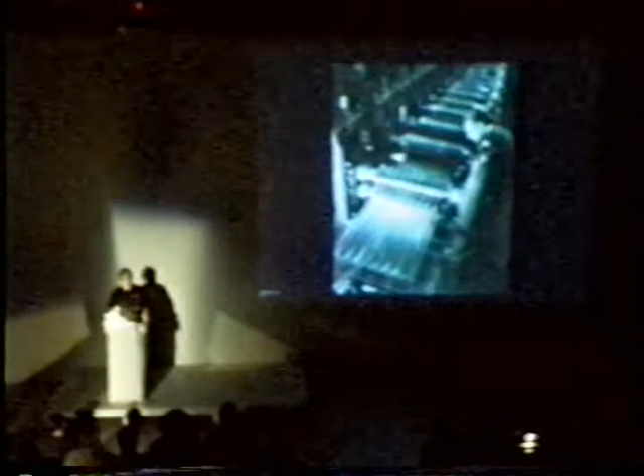You'll see towards the end of this—I also decided that this would be the longest lecture that I ever gave, because I've got a lot of stuff. So I think it's probably not the right night to do that. So what I'll do is go through things very, very rapidly.

But I will, towards the end, pause at just some images of some steel work that we've done as a way of discussing the importation, or basically the importing of the tool into panelization—something I'm more obsessed with at a kind of smaller scale than concrete at the moment.

But the idea—I've shown this slide many times before, and I can't kind of get over it. It's mostly because I like this guy's hair. In 19th century technology, it was just a kind of dumb but brilliant idea that if you look at the back of this image, one roller would produce one crimp, and then ultimately you'd have 12 rollers, 12 segments to 12 crimps to develop a kind of corrugated material.

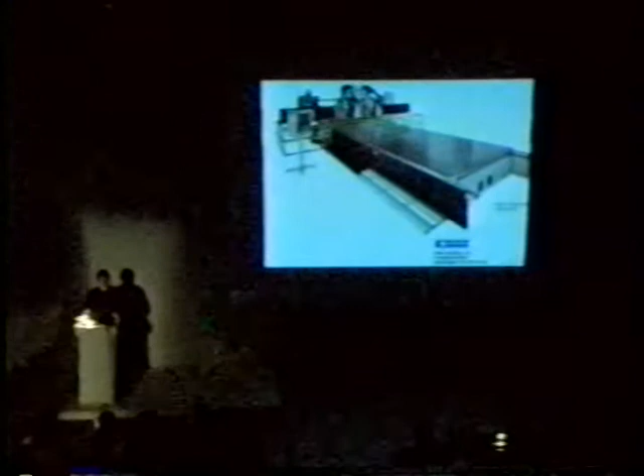I don't have a machine like this—this is just a really pretty one. It's very, very expensive, that's why I don't have one of these. But it's a computer numerically controlled milling machine.

I am going to kind of skip through some things, otherwise we will be here quite some time. This was just really to introduce an idea of this kind of subject-object relationship.

It was a competition in which—I can't resist, I have to go back real quick—it was a competition that I didn't win, or I was actually disqualified, which is better than losing.

I was disqualified because I interpreted the rules of the Battle of Little Bighorn competition as thickness versus actual drawing. It said no models, but I thought I could just machine a bas relief of the boards for the actual presentation. They disqualified me based on that idea, but that was the idea of the memorial I was designing.

There was also this idea of imprint and Native American women's beadwork, which I won't go into right now. But on the back of the board there was a disc taped in an envelope, and it said if you choose this project, all you have to do is take this disc and insert it using a Komo CNC machine and 2-pound rigid foam, and then you can make the memorial.

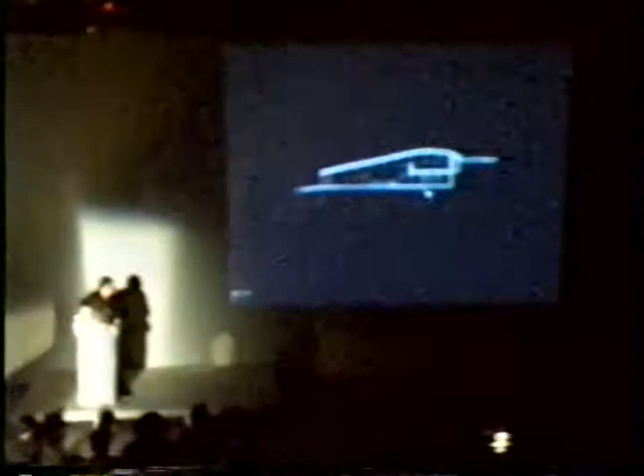The program is the only program that I've done entirely under my own kind of authorship, except for the stuff that you won't see, which is to make money. There's some contract interiors deep in my past, like, I don't know.

The building kind of hugs the landscape, and the foreground and background topographies were in fact the main and primary geometry that I started to use to make kind of enclosure. They were obviously negotiated with structure and structural condition, which I'll talk about in a few minutes.

The idea for the building was a notion of visual rhyming. I don't really know how to define that specifically, except if one says - and being in Los Angeles with the new movie coming out, Cat in the Hat - if you say cat and hat, just by the juxtaposition of those two words, the fact that they audibly rhyme develops a relationship which is a little bit more developed than two words that don't rhyme.

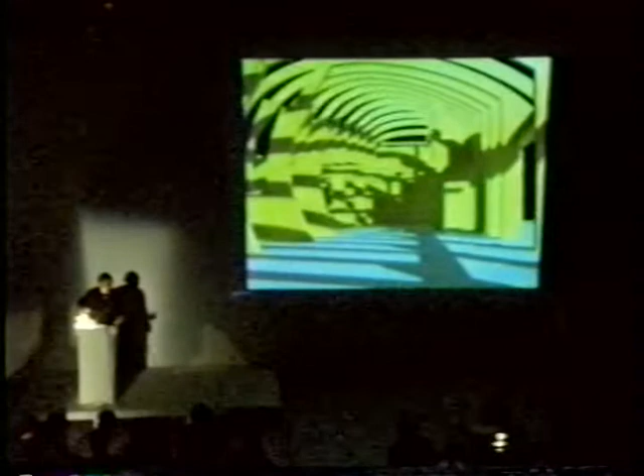I got a Mini, and I hate the large speedometer in the Mini, so I was going to spend the other $1,500 to get GPS, but I couldn't afford it. Effectively, the idea that one can drive anywhere in North America and information as to where you are becomes completely available all the time - the idea of planning and the idea of improvisation becomes very much a criticism of the idea of mapping, to my mind.

The Big Belt house, the house that I'm talking about, was developed in whatever way we could.

We cast models to actually test the structure. I couldn't get anybody to run the numbers effectively - I didn't have any money, that was one thing, and number two, no one was really capable. I just didn't know the right people, quite frankly. I know there are many people who are very capable of doing that.

But what we did in lieu of knowing those people was cast lead buckshot into silicone rubber - any excuse to do something like that is worthwhile - to simulate snow load. So we built physical models in buckshot and rubber, put them on air-impregnated PVC models, big models, and looked at the deformation. You'll see the building is made of these portal frames of concrete.

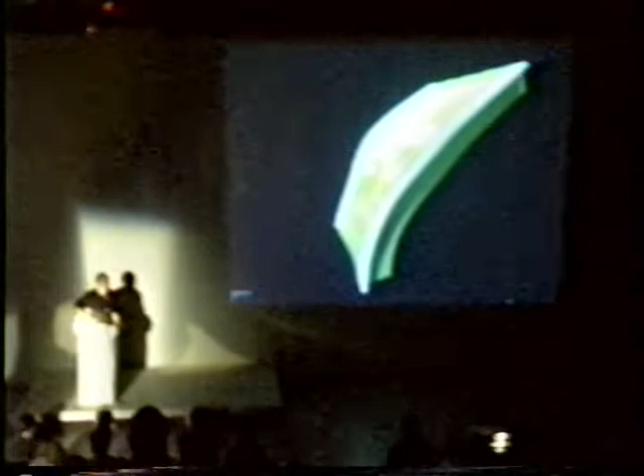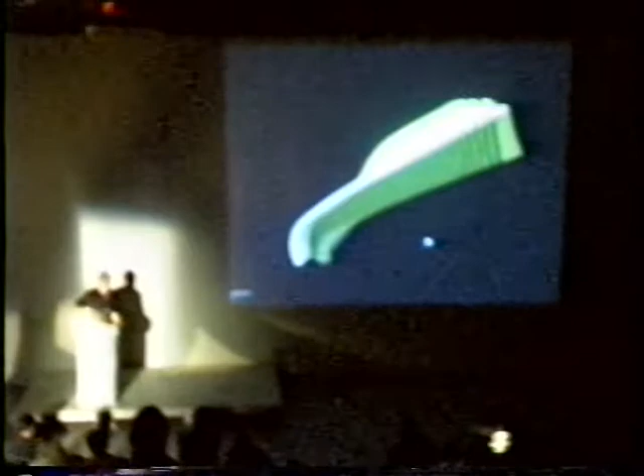Once that was actually happening, somebody came out to the job site and thought it was a really terrific idea—I was trying to quickly shotcrete it with concrete so nobody knew how crazy this was. But somebody thought it was actually a good idea and hired me to do a building in which we studied that relationship. Instead of it being a retrofit condition, we looked at two-directional curvature being a byproduct of tube structure, and this is kind of ongoing research as well.

The way we held the surfaces together in this project was through laser cut steel—actually this is plasma cut steel. This is kind of a little commercial; this is not the Big Belt House, this is the next project I was talking about. I'm not going to really talk about this building at all, except for one thing.

Through the making of these puzzle pieces, through our office being responsible for every piece of material that gets made, more and more we're not really making parts, but we're choreographing work. We now understand that that's really what we're doing. We're actually modeling the conduit of all the electrical and all the plumbing returns on our projects, as a way of producing jigs and fixtures which locate all of those things in space.

So we are not actually producing drawings that have numbers—we're producing drawings that have sequences. What we're doing is thinking about construction and construction documentation being based on choreography versus legal documents. For instance, this whole building.

There's a steel jig that we laid down on the ground. This is an Alaskan reinforced concrete slab, thickened to 20 inches at the edge and about 5 inches thick in the center—it's all radiant floor slab. What we did is we made a steel jig that located every bolt, every plumbing riser, all of the location of the radiant tubing, and also this thing we affectionately called the caterpillar that actually located the edge.

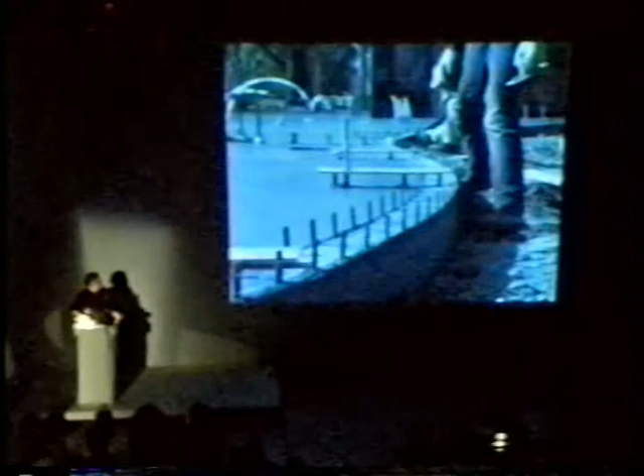Obviously, if that were a straight cut too, the relationship of this curvature would all be off if one positioned it wrong. So what we're trying to do, instead of expending the energy it takes for an architect to communicate something to someone else legally, philosophically, and scientifically, is to take that energy and place it into the notion of choreographing a building.

The ideas of prefabrication and prefab, I really don't think about them the same way other people do. I think about digital space as being the place of prefabrication. But of course, that's what documentation in terms of architecture has always been. It's just a kind of compression of that.

If we go back, you can see that everything is on the slab, there's just nothing else in this building except for the slab in a way. All of the electrical, all the plumbing, it's all in the slab.

No building codes in Montana. That's why I moved there.

And then there's the kind of commodification of that idea by literally producing plasma-cut jigs that just hold and script the PVC pipe in one position, and that one position is easy. In fact, the more conventional components of the building took much longer than the unconventional ones.

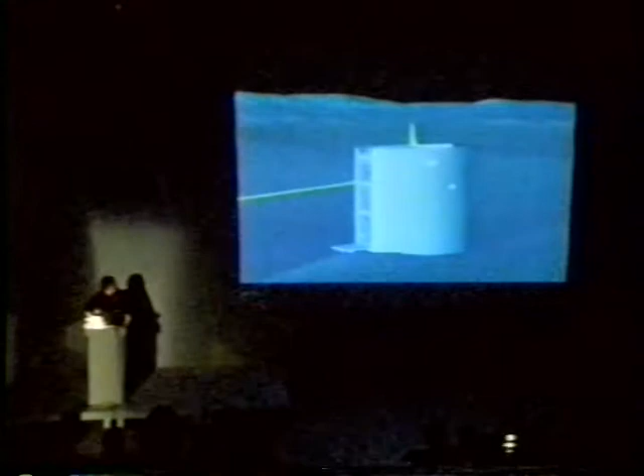I'll move much faster now. This is a view looking the opposite way, where the building sits and negotiates the view off to Mount Edith and this single double tree. You can see this 6 miles of highway turn and get eclipsed right at this joint, and then this is the driveway that comes up.

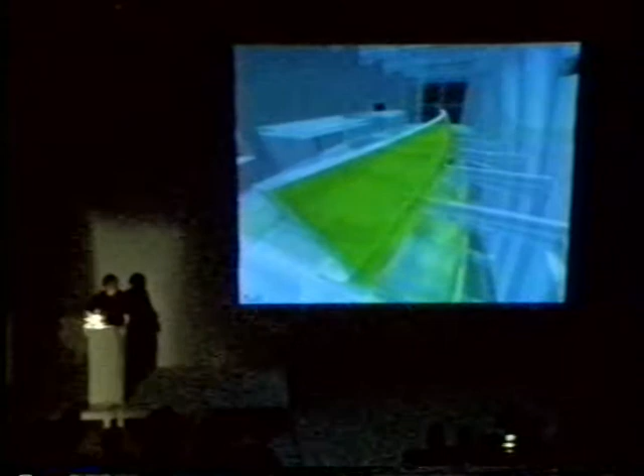The idea was to cast the interior wall and ceiling surfaces out of translucent rubber, but that would have changed the budget from about $160,000 for the whole building, which is what it cost, to like $14 million. So we didn't do that.

Hopefully this image brings us to the next project, which is a house for a photographer, a wonderful photographer in New York. She's shown here, and she photographs kind of mobile architecture, box cars, containers, these kinds of things. But the notion of the building was to remove itself from the landscape, like the hunter's hat, to identify it as something alien or not of the landscape, developing this third relationship to the landscape - first merging, then marking, then ignoring the landscape. I don't have a fourth one, those are the only three I could think of.

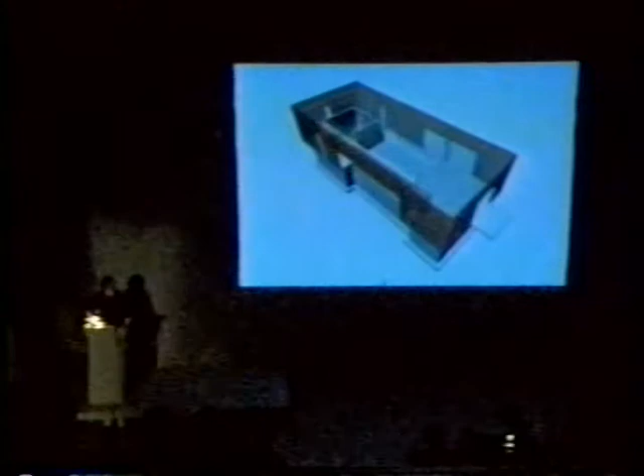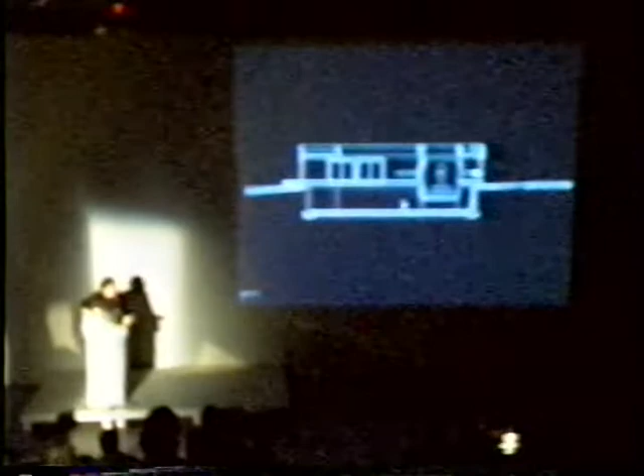This house was fairly small. The photographer is a very interesting woman, interested in challenging certain ideas as well. The building is really just a 1,000 square foot concrete cabin retreat that has a curved wall defining a bedroom. The bedroom is dropped in as a kind of cocoon, going from a dead flat surface into a kind of arced surface. We experimented with producing a computer model to communicate the concrete work, which we ended up not doing.

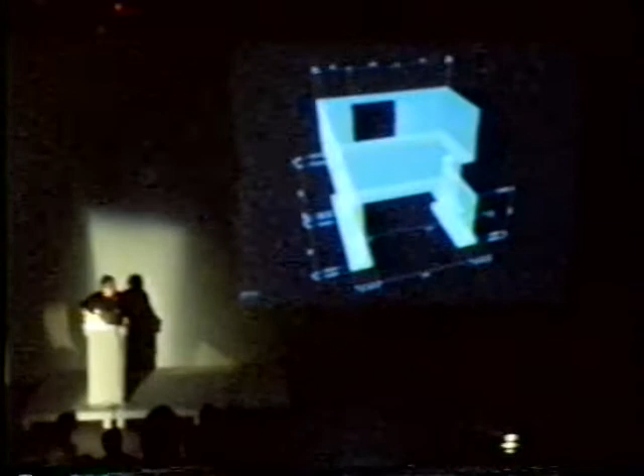We built all the rest of it in Montana and then trucked it to New York. We had a local basement concrete guy do this, and I thought, oh, this is going to be a great idea - I'll just give him a computer model, and wherever he clicks on it, he can find dimensions. It didn't work at all, but it was kind of a nice idea.

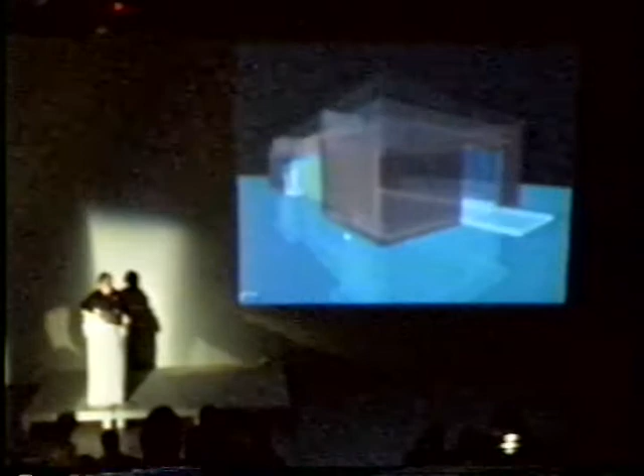The questioning we were able to do was to suggest that this is a very private area, so the notions of privacy, publicity, and exhibitionism could develop their own worth in this place. The front door and the shower door were exactly equivalent in the building, so if somebody were coming to the house, they would have a choice of either entering the shower or entering the front door. There was an obvious kind of critique of the relationship to Mies's Barcelona Pavilion relative to this.

I thought it would be kind of funny to have the sculpture in a strange way be somebody showering in the building. But I'll go rapidly through this. From the front door, you can see through to the other front door, which is in fact the shower. And from the bedroom, obviously, you can see the shower - you have to be able to see the shower from the bedroom. It's a normal piece of program, I guess.

You could actually see everything from the bedroom. You can see through the kitchen to the shower. You can see from the living room through to the shower. So every place you go in this tiny 1,000 square foot building, you can see the shower, and you can also see through, but you're actually looking above the bedroom - the bed is down here. In this case, you could see this.

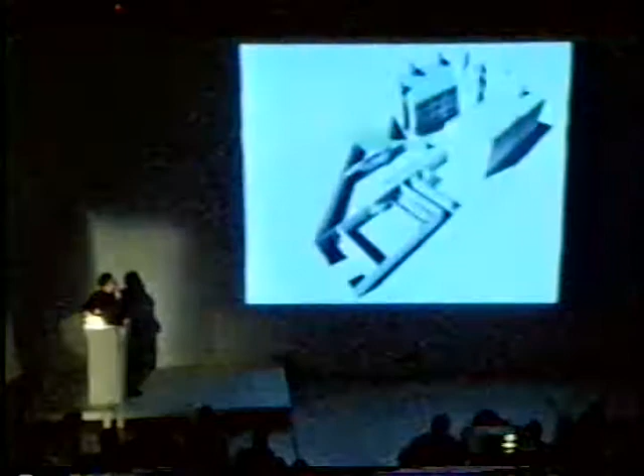I just kind of skipped through the computer work. These are the showers, and there were 3 pools and 3 shade spaces. We tested many of these things in the Big Belt house, and I know Scott Inge is here tonight, a friend of mine who works in Los Angeles.

He flew to New York and in 3 days did like 1,800 welds. He will hopefully back me up about the fact that this thing all snapped together and then was welded very, very rapidly based on the precision of the computer work. We tested it in a model, like the Big Belt house, but those were our CDs.

A great deal of laser cut components. This project was really research, and we approached it as research. We weren't just going to try to produce something, we were going to try to extend what we were thinking about. And this to me was one of the most significant things, besides making it pretty, that we were trying to do—there's a laser pointer.

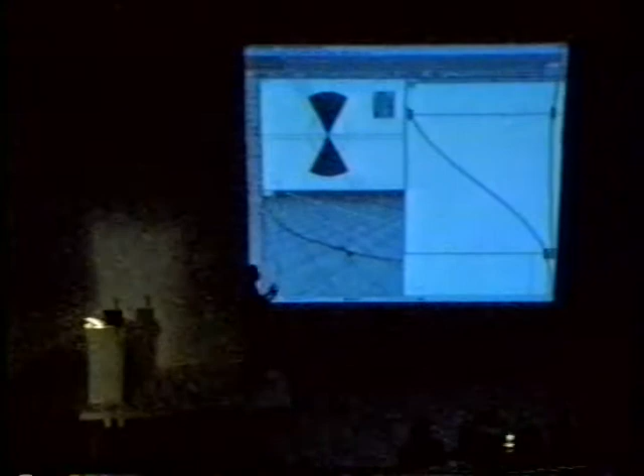What we tried to do is, if you know anything about spline geometry in the computer, if I take that nodal point and that nodal point, and bend one, it adjusts all the way along the curve, because the designers and programmers have embedded material qualities. So what we did in software called Rhinoceros, which you guys probably know, we basically changed the spline tool.

We did this by taking PVC pipe and laying it down on the ground, making a grid out of chalk, photographing it from the roof, and bending it to its fracture point. We took Schedule 40 PVC pipe, bent it, photographed it, then Photoshopped an analysis of that and put it back into the computer, so we knew that whatever we could bend with the tool, we could physically produce and replicate in real space with 100% efficiency without having to think at all.

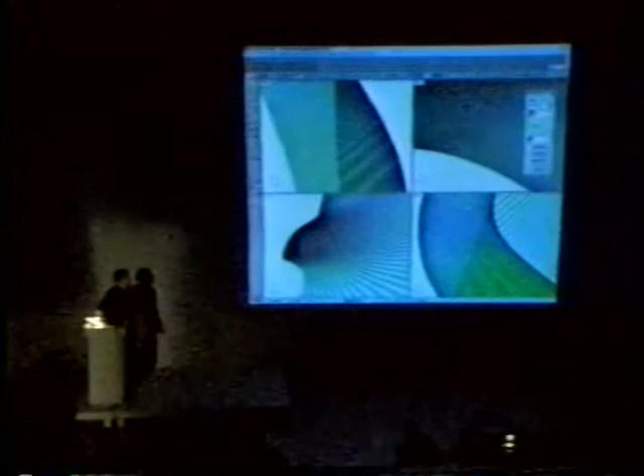So we basically edited the software so that we could produce curvature, which we were sure we could, because there was no real time for testing these surfaces besides a large model. When we produced the large models, they obviously became the actual project.

And these shade spaces were an attempt at taking—a tacit attempt at taking—basically the idea of the subject of what you would see and the object of what it was supposed to be relative to making shade, and allowing the surface and where people sat and hung out to be the projection plane.

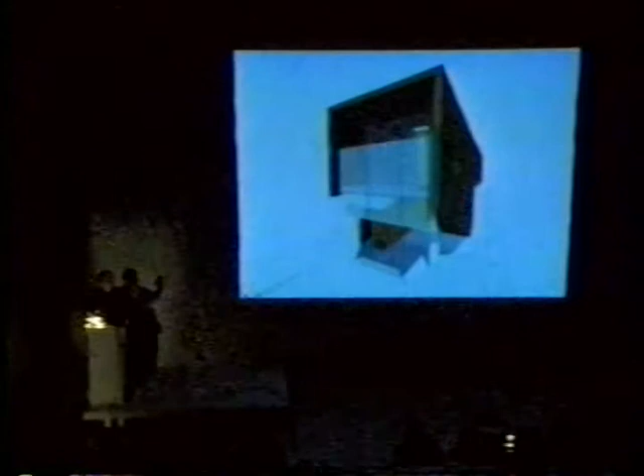This is a strategy for Brian and Adrian Sipes, who have a very beautiful mid-century modern house. Effectively, because of certain criteria around fire and side lot lines, all of these things, they couldn't do anything. They went through, I guess, 3 architects and couldn't do anything.

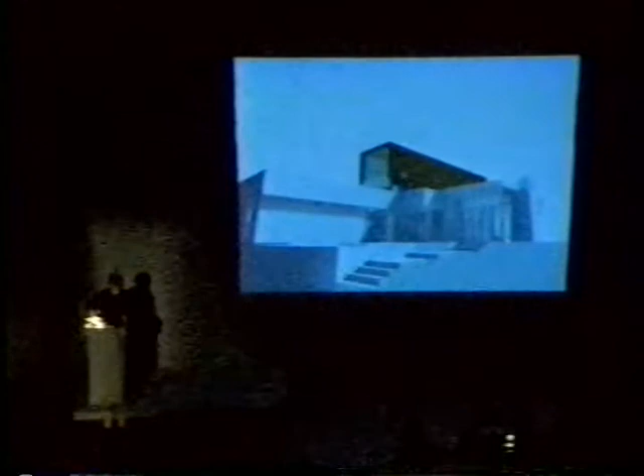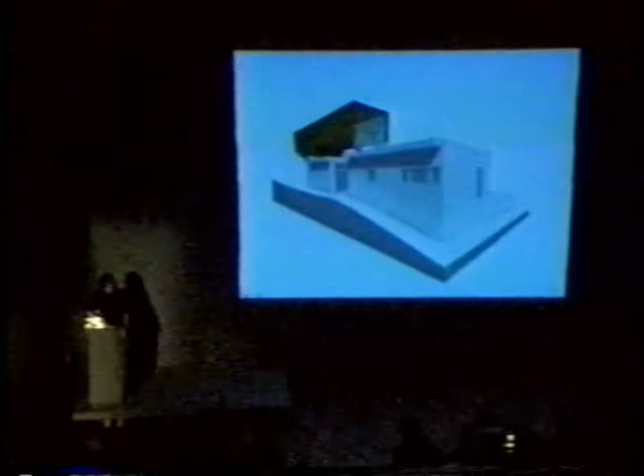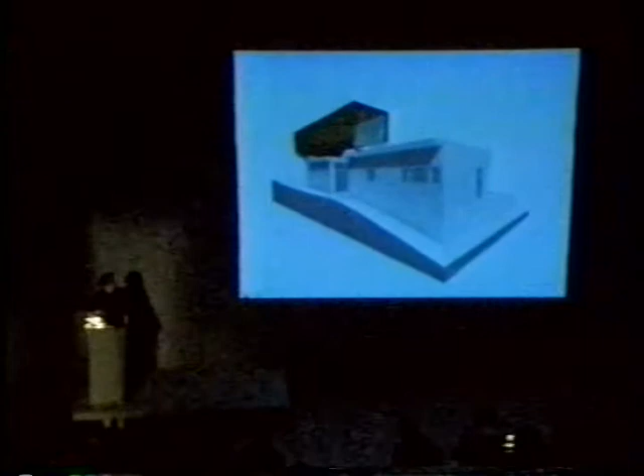So we separated the building with 6 feet of space and made the entrance a separate building, fireproofed certain things, and with all of that we were able to do it. It's got a Corten puzzle piece skin—we place this little tube on top of the other building, which basically spans across, so the site doesn't have to be disrupted, and it couldn't be disrupted for certain reasons. It sets down with a column in a courtyard and then another column in the driveway. So this is what's happening in the courtyard here.

It's basically just a master bedroom and master bath, which has a small kind of studio balcony on the back side. And these are a lot of the drawings.

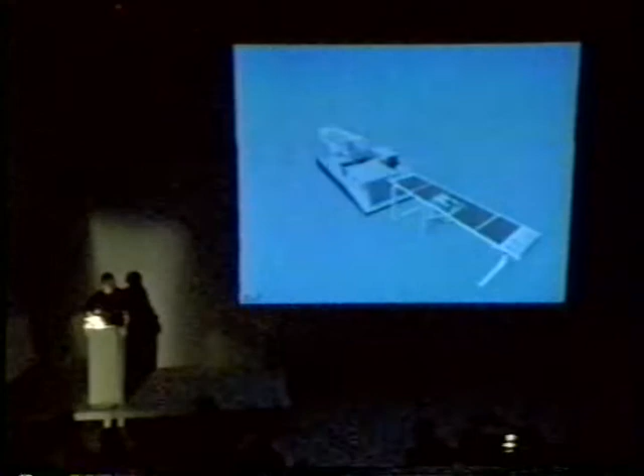We have a big laser cutter and CNC machine, so if you can produce a model with incredible efficiency, why not? I don't understand why keep things in a kind of embryonic stage when you can birth them. I don't get the idea.

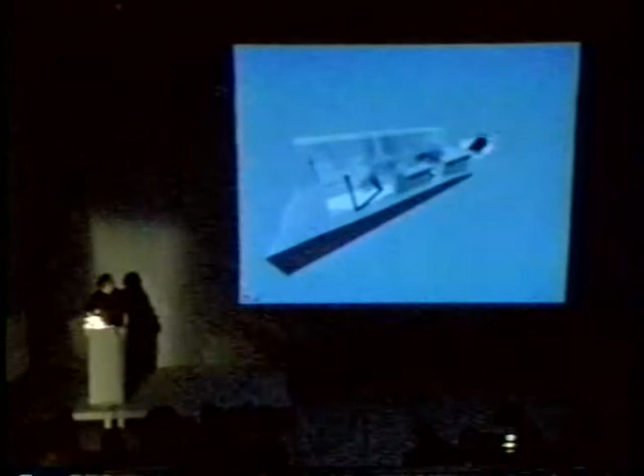Anyways, these are all the actual computer models that will generate the structural steel, the stress skin panel infill, and so on. The building sits atop the other building, and it has a very, very beautiful view of downtown Los Angeles.

An installation which didn't work. I'm just going to go fast, but it's an interesting idea of deployability. We tried it at the Shanghai Biennale, taking bamboo and, from a starting point and an ending point, developing a relationship with very complex curvature by using an indigenous material—bamboo—and another indigenous material, Day-Glo orange zip ties.

These complex kind of combs were used to bend the beginning and ending point of the bamboo to develop these surfaces. The idea was, once again, to do all the computer work, test it here, and then send it to be laser cut in China. But the steel was mild—it was supposed to be stainless steel. It didn't work. It was terrible. It was very frustrating, but here's what it was supposed to happen.

We labored over these subtle, odd bending moments so that we could build everything by hand with no tools, using just steel, zip ties, and bamboo. So what we'd do is bend each piece of steel, fold it back, then add another piece to develop further density, attaching the bamboo, and then the zip ties, to attempt to develop a new surface and a new entry to the Shanghai Biennale Museum. Didn't work that well.

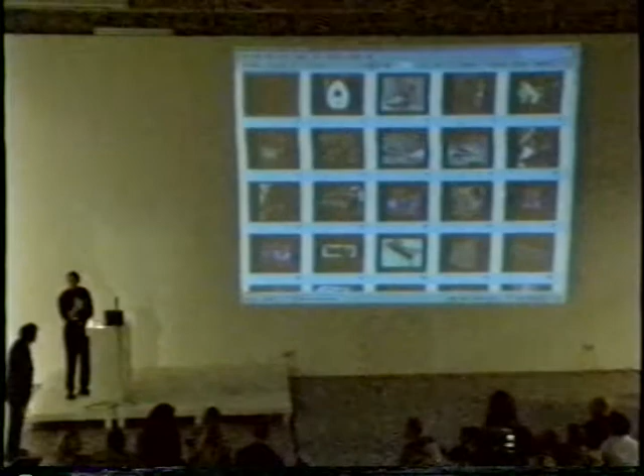If you have a question? The wall that you illustrated at the beginning of the lecture—you said it had greater strength in several directions. Would that be a viable wall for a building? There's a good friend and structural engineer sitting right over here, so I would almost defer that question, but...

the answer anecdotally would be yes. I mean, if you can take a piece of steel and, by punching it, bend it in two directions diaphragmatically, as well as even in compression, obviously you can get something to resist load. If I take this piece of paper and push it like this, then if I bend it this direction and push down, I can support so much more load. So it's just—the answer to me is yes. Have I done it? I don't know. But yeah.